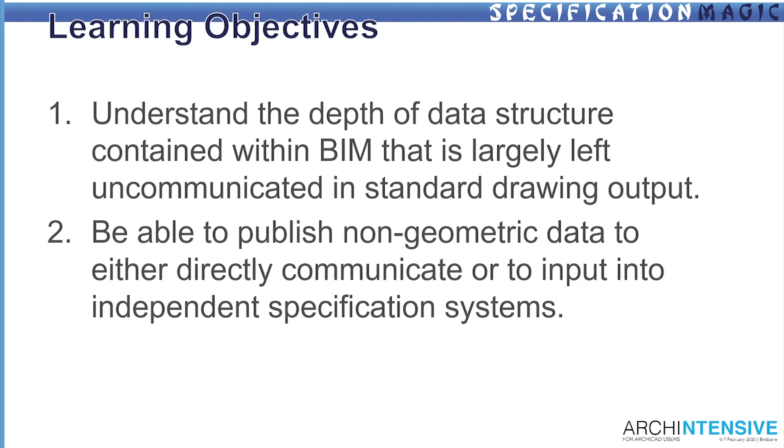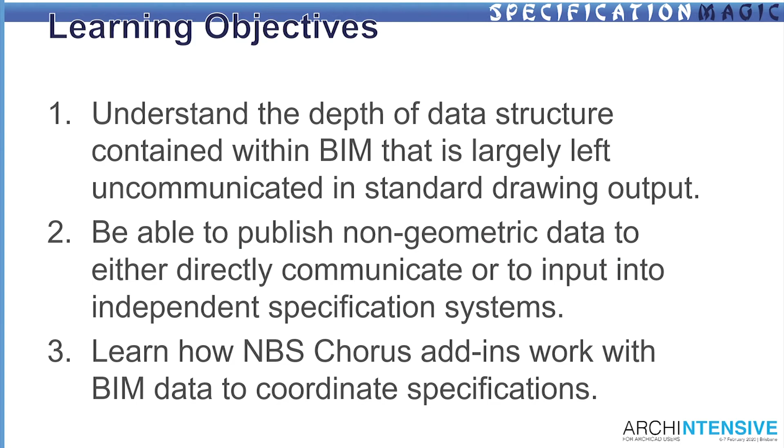So let's get on to our learning objectives today. The first thing we're going to talk about is understanding the depth of the data structure contained within BIM. We're also going to learn about how to push non-geometric data around in our models. And then we're going to learn about the new NBS Chorus add-in for Archicad and how it works with BIM data to coordinate your BIM specifications with your model.

So the story of Journey to the West starts with a monkey imprisoned under a mountain for 500 years for defying the gods in heaven. And I liken this to the amount of data that we get stuck with every day in our models. We have a wealth of information that sits in our model data that we never use, that we never share with our contractors, we never share with our consultants, because 99% of the time we reduce it to a drawing and send it out, and most of that information gets lost.

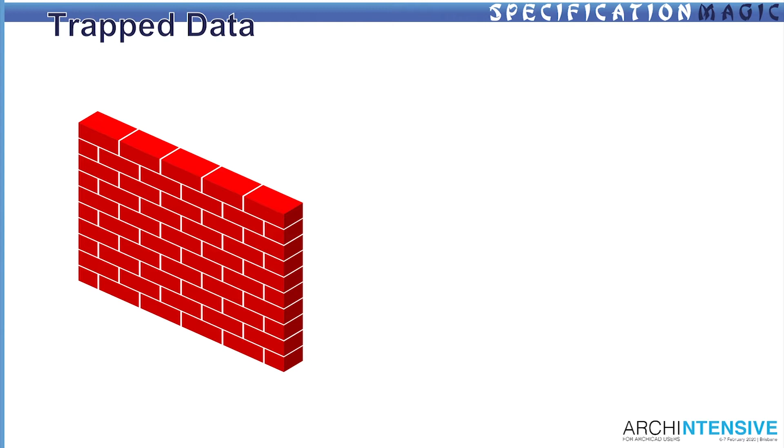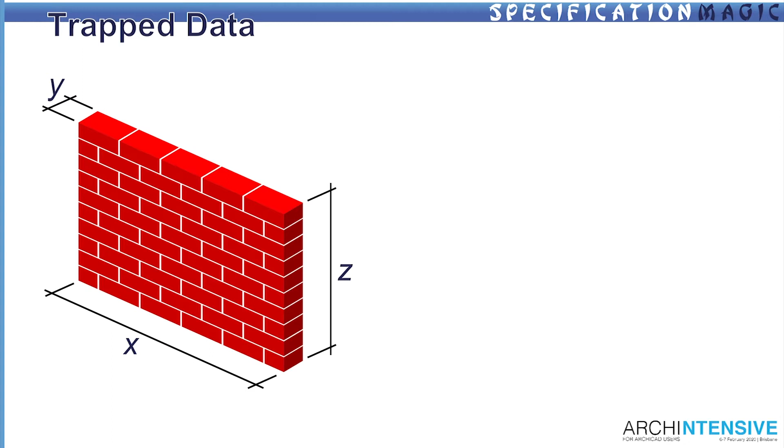When we talk about building information models and trapped data, we talk about things as simple as walls. This brick wall, on a drawing, we can express the basic geometric information of it. So we talk about its height and its length and its width, and we give it some basic information. On drawings, we have pen weights and cross-hatching and things that give it some description as to what it is. But the basics of it is that on a drawing, it gets basically defined as a brick wall at best. If you start to put more and more information into it, the drawings get confused and very hard to read. And so we end up trying to embed all of this data somewhere else.

There's a lot of information there, and that's not even the start of what goes into a brick wall. We have bricks, we have mortar, we have execution into how we want the bricks laid. We've got information about how we want the courses set out, how we want the brick ties done, how we want the cavities flashed, how we want the damp-proof coursing done.

All that information is very difficult to show simply on building information models or on drawings, without having to do lots and lots of 1 to 5 details, like they do in Auckland. And I'm not advocating that we need to do more 1 to 5 details. In fact, the less 1 to 5 details we do, the better, as far as I'm concerned.

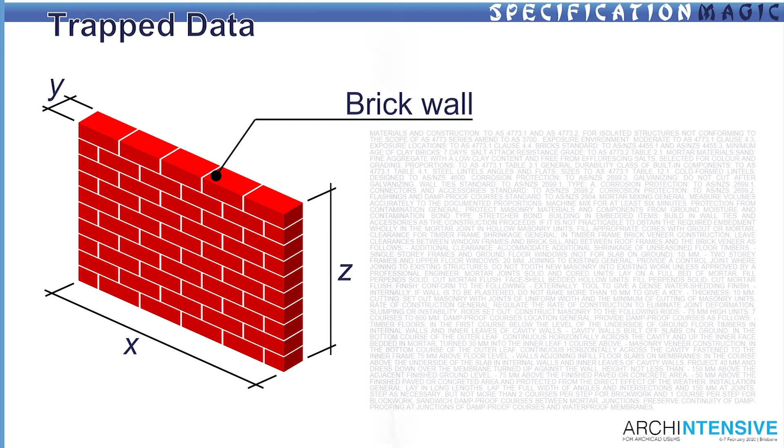So we want to take that information, which we can't show on the drawing, and find a way to put it out there. Because if we're not communicating it to our contractors, they're not going to know what it is that they're supposed to do to execute our design work. It's the beginning of wisdom to say, I do not know. But it is the end of wisdom to say nothing and hope that everyone else knows what it was you were thinking. We need to be able to communicate this information out to everybody.

If we go back and look at the evolution of how this information has come about, and how the building industry over the eons has communicated it - right back in the earliest days, we were doing chalk scratchings on slate boards, and that was how we communicated everything, changing and morphing it every day as we went to site and told them how to build the temples and how to build the pyramids.

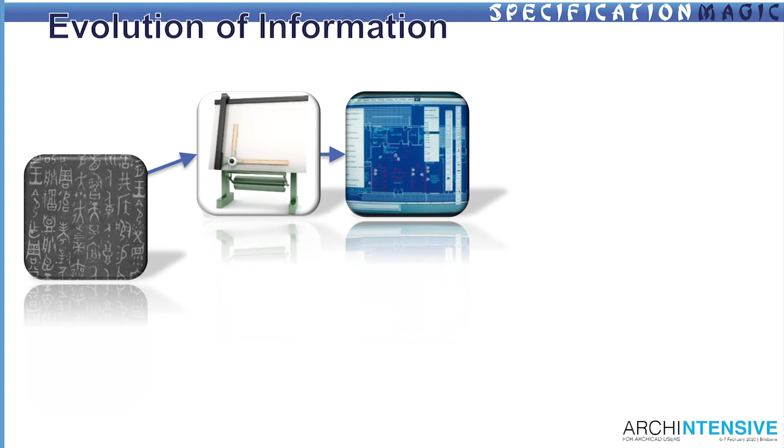From that, we got a division though. We slowly moved away to the drawing board and started to use paper and pens, and we came up with drafting conventions and ways of illustrating these things onto paper. And from our paper drawing board, we eventually moved into the digital age and we got to CAD.

And CAD was basically just the drawings, but in a computer. There was no more information, no benefit other than speeding the process up and the ability to copy and paste and things like that. There was no more information communicated through a CAD system than there was through a drawing.

From that, we've moved into BIM, and we've started to pull a lot more information into our models that define what these things are, what these objects are that we build with - they're buildings, they're walls, they're windows. So there's a lot more information that's intrinsic in the model.

But unfortunately, most of the time, we convert that just straight back to printed drawings that go to site, get all scrunched up, and that's the end of them. So the information, again, gets lost.

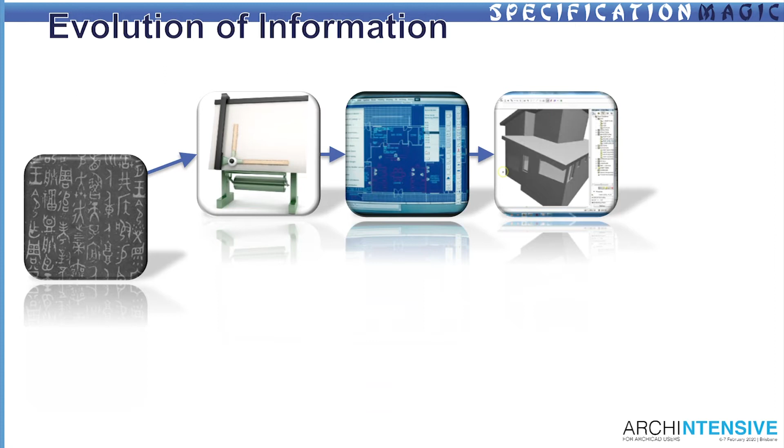And we're making advances every day to get further than the drawing board and further than the printed work, and we're trying to deliver things with VR and on-site iPads and all these wonderful bits of information. But if we're not accessing that depth of data that's inside those models, we're still not gaining a lot more than we lost back with the chalkboard.

Now, in parallel to this development of the drawing side of our communication, our specifications moved to the typewriters at the beginning of last century. And about three-quarters of the way through, they moved to Word documents. That's about as far as they got - that's about as much development for a long time that we saw.

We had some extra things that we started to put into Word documents - we could do hidden text and format them beautifully and share them via PDF. But that's about the level of development that we got to. We were kind of stuck back at the old CAD stage, and the specifications hadn't moved with us as the rest of our product moved into the BIM space.

So I just want to talk now briefly about the different models that we've then seen of how model information, BIM data, and specifications can work.

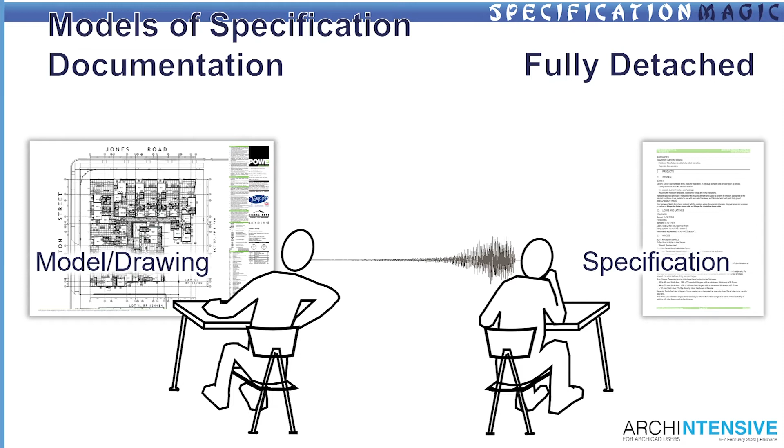The traditional method, I'll call the fully detached method, where the architect looking after the drawing sits on one side of the office and the other architect looking after the specification sits on the other side of the office. And the entirety of the communication that happens between these two processes is shouting across the room. If you're lucky - chances are you've probably outsourced the specification and you're shouting down a phone to the other side of town.

As the Buddha says, as the traveller who drags his feet only raises dust, so too the specifier who writes in isolation only creates painful scratchings.

If the information from the drawings and the specification are separated, they're going to conflict. They're going to have clashes. There's going to be a loss of the information transmitted from what the architect intends in the drawing and what the other architect intends in the specification, at best.

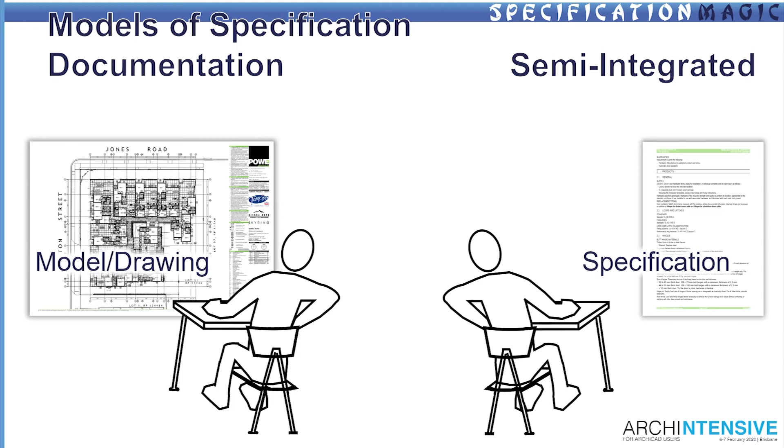So we then start to come up to a semi-integrated way of trying to deliver this information. We take our models and our drawings, and instead of shouting across the office, we actually find a way to extract some information out of our BIM and share it across the office to the spec writer, who then puts that together, in the hope that the information we're sharing means something to them and it actually formats across correctly, without creating too much work for ourselves.

But in the end, we end up always creating a lot more work for ourselves. Now, the basics of this workflow that we have developed in our office over the last couple of years: essentially we start off with our BIM, and we've got our model there of a nice interior space.

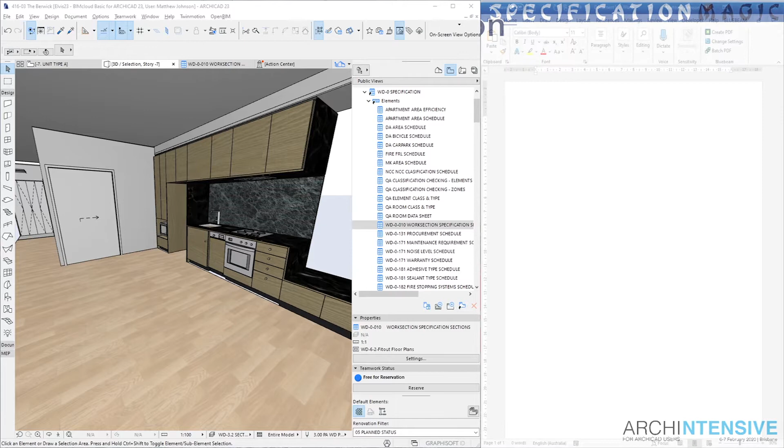And from that, our spec writer is going to start with a blank page, because at the moment we've given them nothing to work from. So from our model, what we'll do is go through, using the classifications that we talked about yesterday, because we classify everything in our model.

At the moment, we were classifying everything in our model to the NatSpec classification system. So everything in our model was pulling out its NatSpec code. We then produce this schedule out of our document, out of our model, and export it out as a list, as an Excel file.

And the spec writer on the other side of the office picks that up and goes and creates a matching list of Word files that match all of those clauses that we came up with. They've manually got to sit there and go through NatSpec and find each matching clause and put it all together. And then they go through and start to draft these bits of information.

And so what we do then to semi-integrate this is that they work on the stuff that's completely non-graphical. They work on all of the general clauses at the beginning about the Australian standards that we should work to, and the requirements for submissions, and the requirements for cross-referencing, etc.

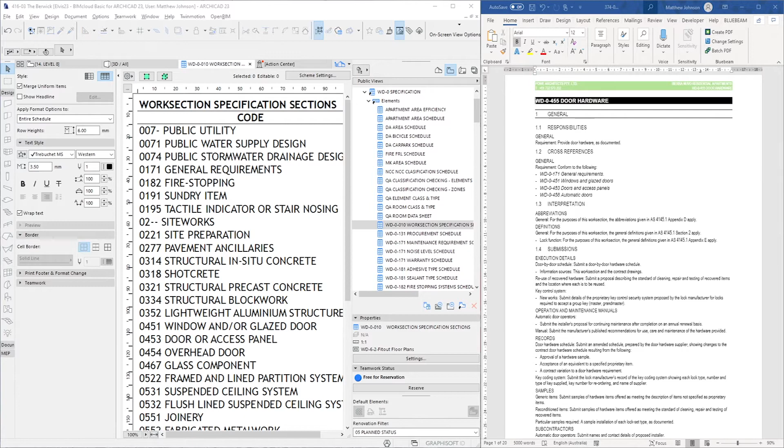And then in Archicad, we then try and come up with a way to create a schedule that kind of looks like what the NatSpec schedule in the back of that section looks like, as close as possible, with a lot of difficulty and a lot of blanks and a lot of confusion.

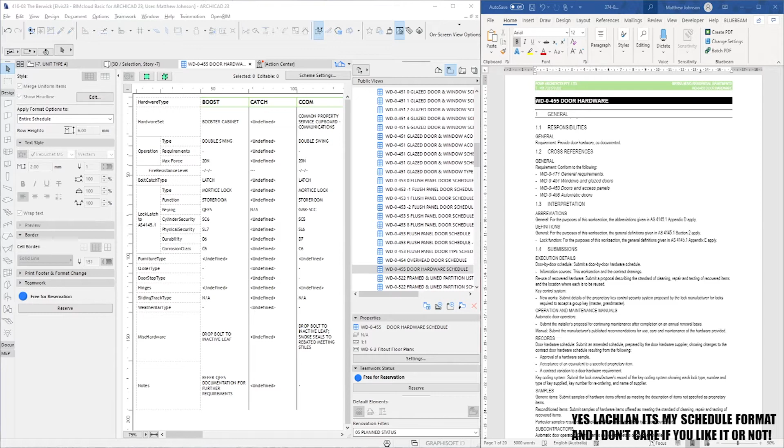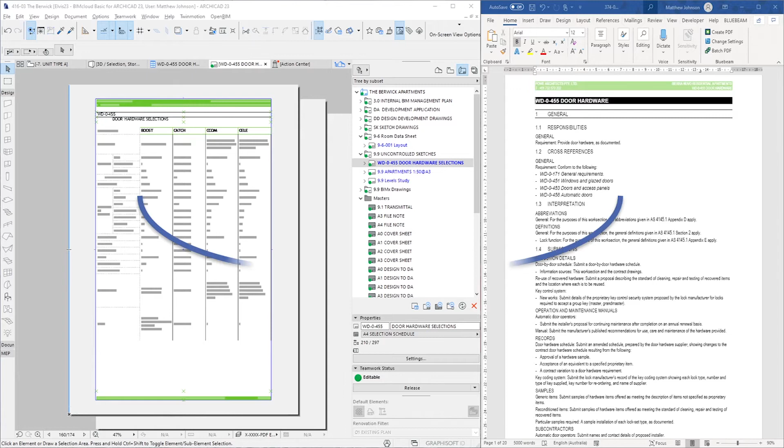And then we try and format it onto an A4 page so that we can try and squeeze it out in a way that, again, makes it look like it was written in Word. And then we pull those two bits together and we try and ram them together as a PDF and send that out to the client or the contractor, and hope they don't notice how much work it took us to do that. And hope we haven't burnt the entirety of the documentation fee on doing that process, which we have.

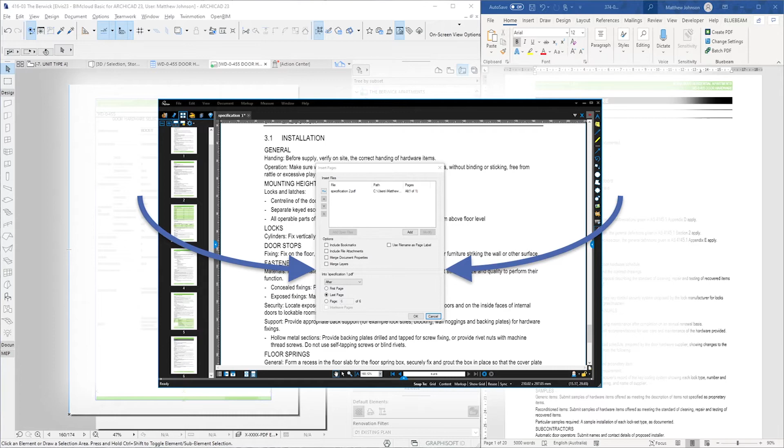The benefit of that process is that the clients and contractors we work with end up with a specification that they know and love, because it looks exactly like the specification they got last time that was done in the very manual way. And because they're against the idea of change, they've got something they're comfortable with, so they won't complain about it and they'll just get on with it.

The problem with that is that, as I said yesterday, we've created over 1,600 properties in our Archicad files just in an effort to be able to output those schedules in a format that kind of looks like it might belong in the back of a NatSpec specification. And managing all of them is a massive task, and somebody removing a property from one of them is a project killer, which is why backups are absolutely essential.

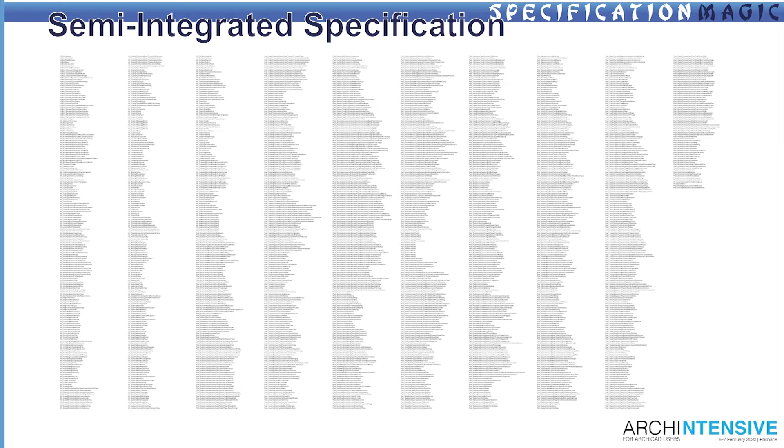So we do all this to make sure that it looks like we know what we're doing on the outside. But when everyone else sees a blue sky, there's always someone flapping his arms to keep the clouds away.

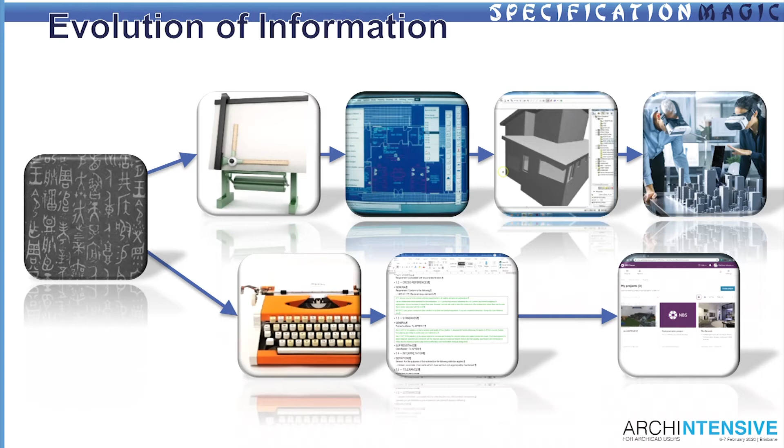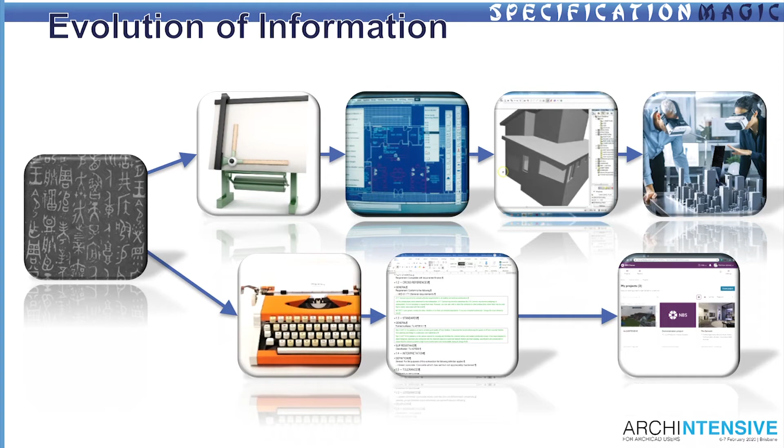So what we've now got, thanks to the NBS system, is Chorus. Chorus is a completely different way of looking at specification writing, well beyond the old system of typewriter and Word files. It is nothing like what you're used to from other systems you may currently be using in your offices. Chorus is built completely new. It's based on Uniclass, with all the benefit of the classification system without all the drags of having old Word files to go through.

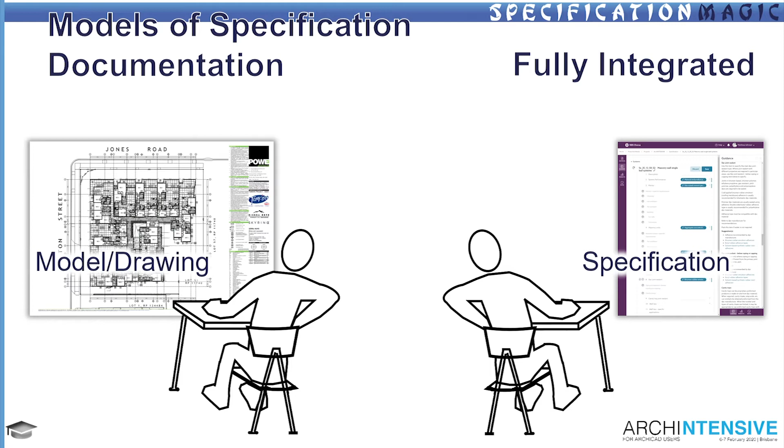So now with this, we can actually have a fully integrated approach to your specification. We can use this add-on that sits in between to connect live specification data, which is what it's become. It's specification data, no longer just words in a Word document. And our live data in our model - we can actually connect the two. So rather than sitting on either side of the office yelling at each other, our two architects can actually work together on the project at the same time.

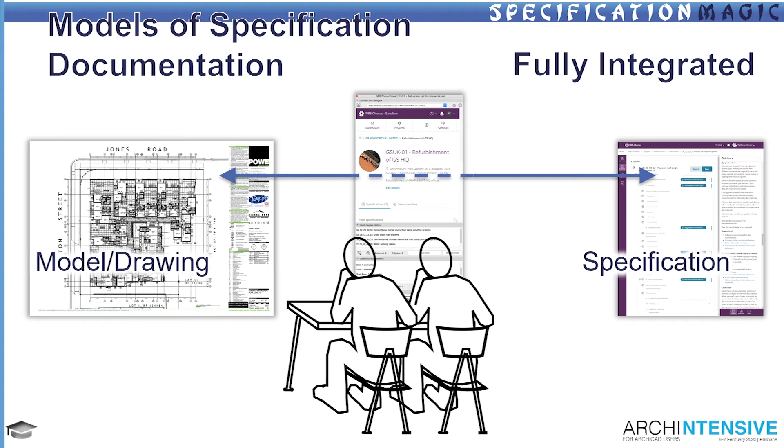Now, yesterday I showed this slide about the depth of model information. On the left, we had our level 4 classification that had a couple of properties, and over here we've got our level 2 classification that had a lot more properties. We talked about how much property information we needed to put in when we only went down so many levels of specification. The thing is, all that property data doesn't necessarily have to exist in your model.

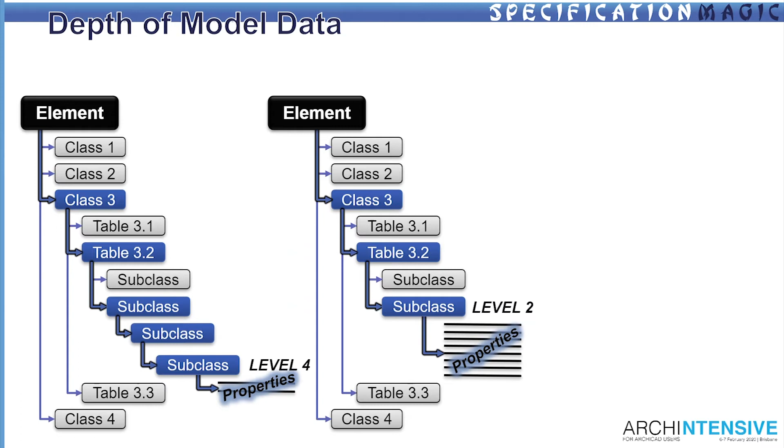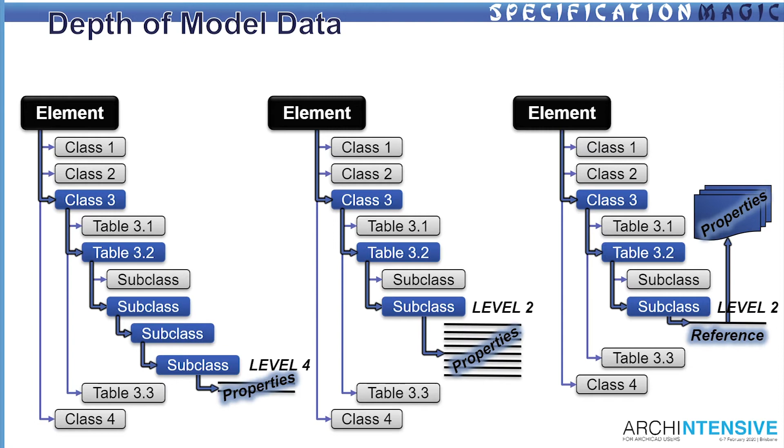It can live outside the model. So what the Chorus system with this add-on actually allows us to do instead is to get down to a classification system, maybe only as deep as level 2, and then use an external reference to where all that property information can be managed on a separate system. We keep the property load inside our Archicad file quite light, and we keep our Archicad file quite nimble. Also, the level of information that has to be assigned by our architects and CAD technicians inside Archicad is significantly reduced, because instead it can all be managed by the external Chorus specification system.

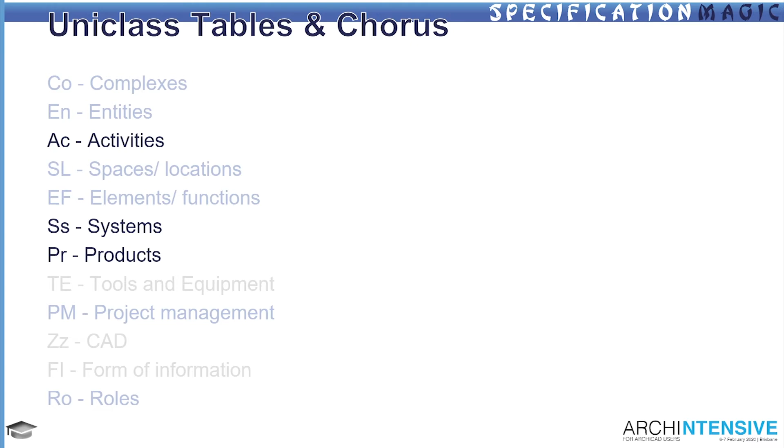The next thing we're going to do is drop out some of the ones about complexes, entities, spaces, and element functions for the moment because we don't need those either. And project management - we might come back to that later because that deals with preliminaries and things like that in our specification. But for the moment, I want to focus just on these three: activities, systems, and products. And we're probably going to drop activities as well, actually, for the moment, because systems and products are the ones we really want to focus on.

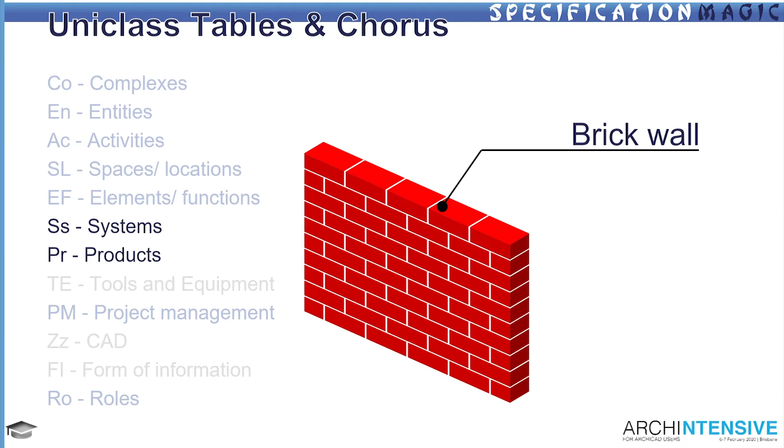So let's go back to our brick wall. We can continue talking about this as just a brick wall, but we can classify it as something better. Rather than calling it a brick wall, we're going to call it a masonry wall single leaf system. Sounds really nice and complex. And we can give it that code - an attributable code in that classification system that makes it more identifiable as what it actually is. But as well as getting that system classification for what that system is for that wall, we can actually, by doing that, pull in a whole heap of nested other classifications that then can exist within that.

Because we have to have some form of adhesives, we're going to have a product classification there for what the adhesives are for putting the bitumen waterproofing on the back of it. We've got the specification for the actual clay bricks themselves. We've got some damp-proof courses that we're going to have to specify, and some more waterproof coatings, and we've got some foam strips for our expansion joints, and we've got some mortar we have to specify, and the masonry cements that go into the site-mixed mortar.

So we've got all that information, but we don't want to classify that and actually attribute that to the wall, because as we talked about yesterday, we want to make sure that when we're classifying these things, we classify them to one class. So we're going to classify that with the system that makes up that wall, not 10 other classifications at the same time.

But what we can do by linking this across to a Chorus specification system is that by coming up with the single classification for that wall to say that it is a part of the masonry wall single leaf system, we can actually use the deeper referencing within Chorus to cross-reference then to all of these other requirements that can be part of that. And they're all classifications, they just don't need to be directly attributable to that wall.

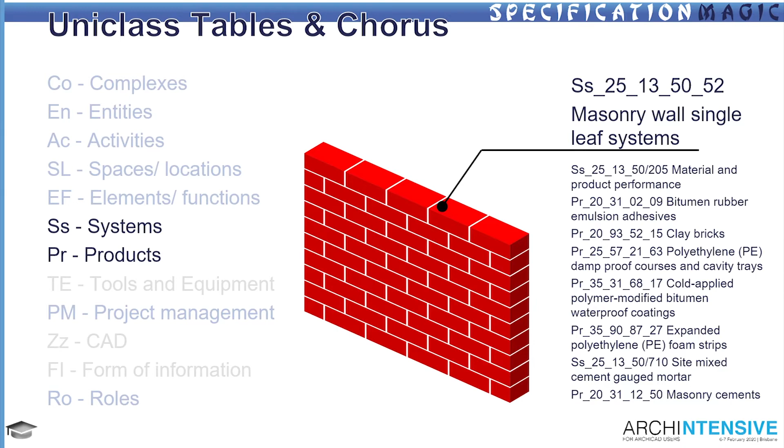The other parts of the add-on, we get a used clauses history window component. This portion of the add-on actually shows you which clauses have already been linked into your model data that you're working with. And if you happen to go offline, you can already use these pre-attached clauses and attach them to other elements inside your model.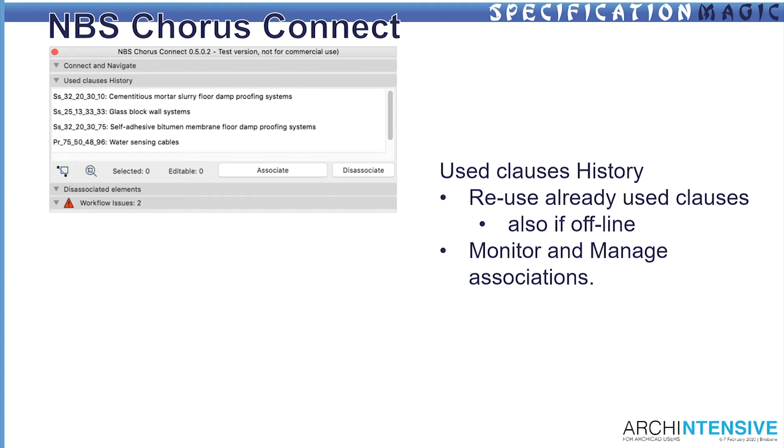So yeah, you can reuse clauses, and it also allows you to monitor and manage the associations. So yes, you can go through and select these and associate them to more elements, but you can also use it to go through and disassociate from the elements that you no longer want to attach those clauses to, if you want to swap them over to another clause or something.

We also have the disassociated elements section. I love the term disassociated, as if it's somehow been kicked out of the church or something. So the disassociated elements section identifies the disassociated elements in the model.

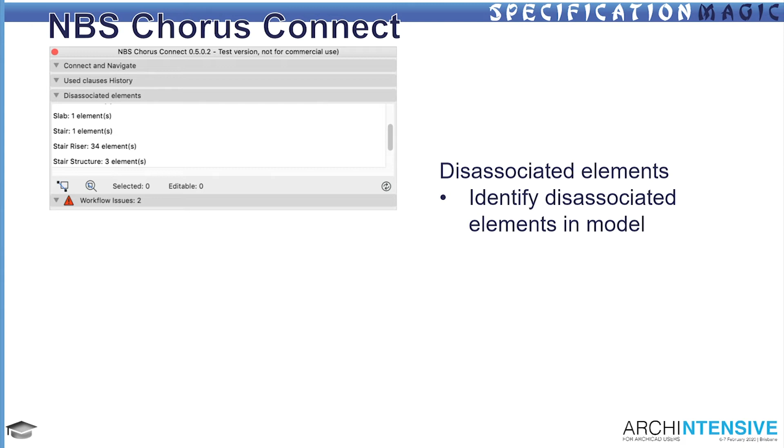It only lists from the active viewport. So if you're in plan view, it will only list the objects in that story that you're looking at. It's not going to tell you everything in the entire model, unless you happen to have it in the 3D window with everything turned on, and then it will start to tell you everything that it can see. If you've got the layer turned off, it won't list it here as disassociated. So that way you can turn off the layers that contain things that you don't necessarily want to be specifying.

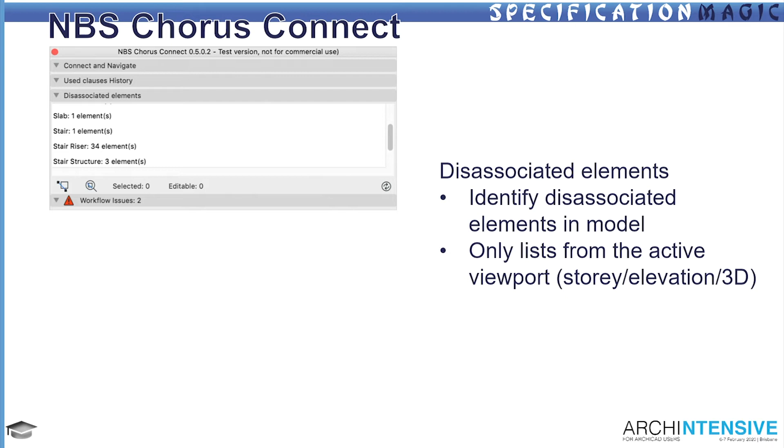Say if you've got layers that are containing your existing buildings for a renovation project or the neighbouring properties, etc. Turn those layers off and they won't turn up here as being disassociated, so you don't have to worry about trying to specify the building next door.

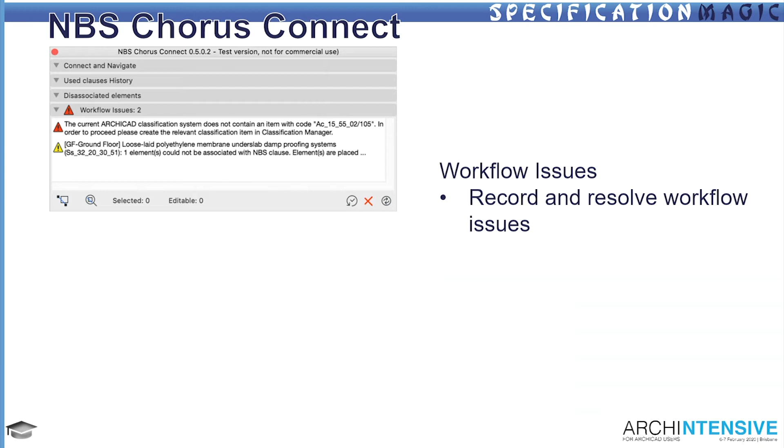The last bit of the add-on then is the workflow issues section. And this basically tells you when things might not be going the way you intended them to. So it helps you to go through and identify bits of the model or bits of the system that are not working. And we get two types of errors here.

We get a yellow warning, which is a fixable issue. And the yellow warnings are usually fairly simple things that are easy to do. It's normally things like you're trying to assign a specification clause to an object that's locked on a locked layer, or not reserved in teamwork. Fairly simple thing, and it will suggest to you that you want to reserve that first.

The red warnings are a bit more serious. Red warnings tell you about things that you need to fix before you go any further. And these are normally bigger, more fundamental system issues, like that classification system doesn't actually exist in your model yet - what do you want me to classify this as? And again, it's fairly good in terms of giving you feedback and letting you know how to work through those, so that you can actually address those issues.

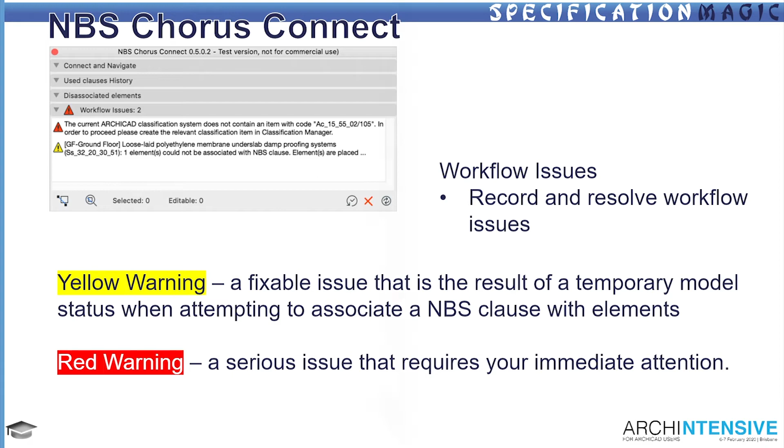So rather than just showing you stills of all of it, I'm going to try and do a live demo again. So we'll see how it goes.

As I said to you yesterday, I've got a very good reputation of breaking things. I have broken this a couple of times, but that's mainly my fault, not its fault. I will try and get this to work, so bear with me for a couple of minutes while we try and load this file.

Ooh. Crunch, crunch, crunch, crunch. That's the first not good sign.

Could be both. Disassociated means that there's currently not an association between an object, a clause from the specification, and that particular object that's in there.

Okay, so I've at least got that up, but it's not replicating my screen. Okay. Remember these for today. Oh, that makes it much better.

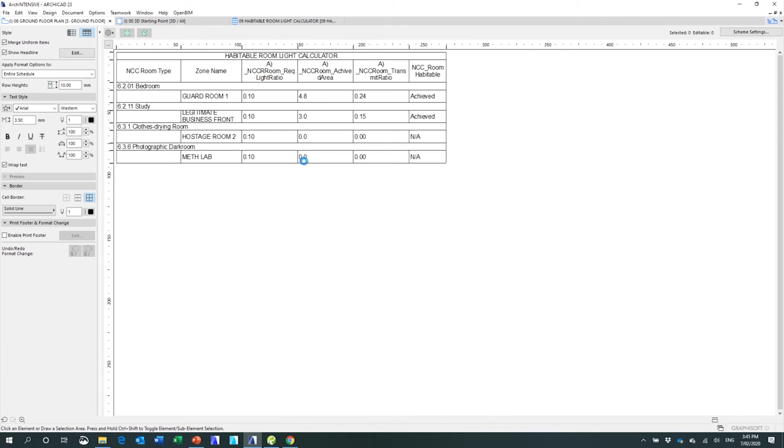But I searched for hours for it, and eventually found it. But there is a little bit of language and cross-referencing there that you do need to get your head around, and we're actually working on it, almost a how-to-learn-British-terms-for-building dictionary in the office, so that we can help people to find the right things. But it is slowly working, and that allows us to make sure that we get the right clauses.

But yes, there is Australian standards references in there for all that information. And one of the things that you get out of this, and I guess also while that's loading, I'll show you just an exemplar specification. So this is a sample specification for a primary school. And this is what the output specification system looks like. And you can see, yes, it is very different to what you're probably used to in terms of your specifications, but it's fully cross-linked. It's designed to be an active document.

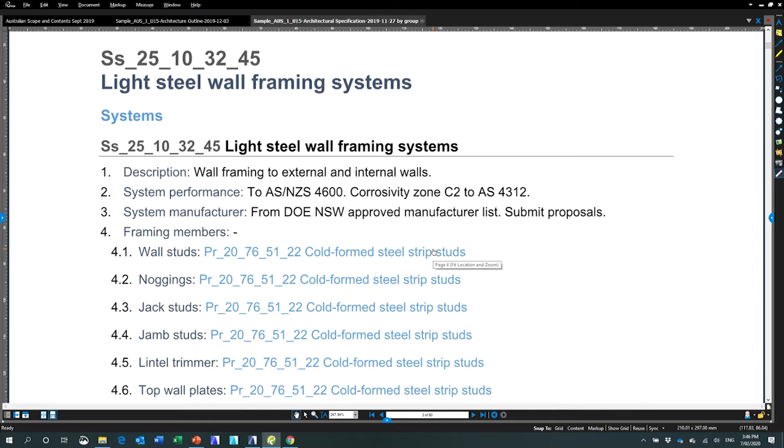You can print this if you really want to. If you want to destroy the planet, go ahead, print the damn thing. But as a PDF cross-linked, it's incredible because you can start to actually go into these clauses, and rather than having to go 'oh, that framing member uses these cold-formed steel strip studs, I wonder where that is,' well guess what, there it is. You just cross-link and hyperlink the whole thing through.

Oh, mineral wool slab insulation. Oh, that's to this CodeMark certification scheme. I won't click on it here because of the network link I've got, but that will then take you to the CodeMark certification scheme so you can understand a bit more about that. Oh, this is to that standard. This will take you to a page that talks about what that standard is and what it entails, and then eventually you'll be able to cross-link across to that. If you've got standards access, you'll be able to know what standard to go and do and look all those up. So yes, there is Australianised content in this.

The Australian content is constantly building, but in terms of the output, I'm falling in love with this format of this specification every day I start to use it, because it's much easier to find your way around rather than having to leaf through it. I mean, this one's a simple one and it's an 80-page specification.

Who here has done specifications of more than 100 pages? Who's done more than 200? It's crazy trying to sit there and imagine someone on site with 200 printed pages trying to find the specification of the screw that they need to buy.

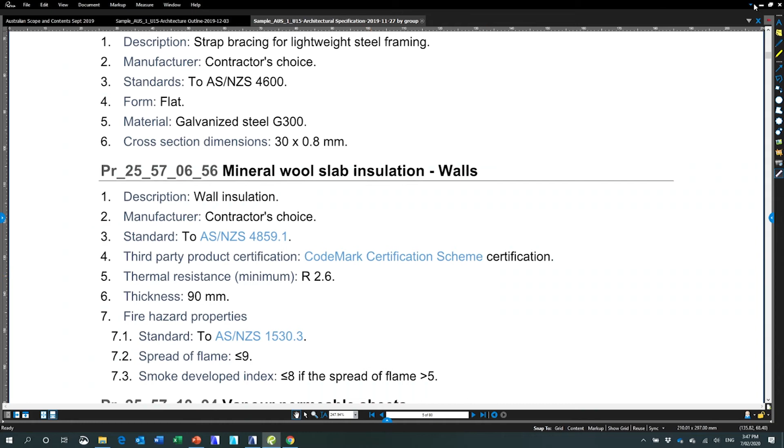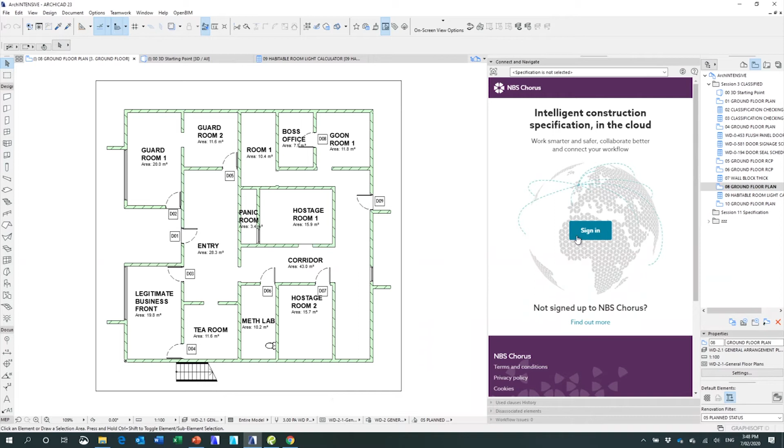Come on, phone, work. Yes. Phone, keep working. Thank you.

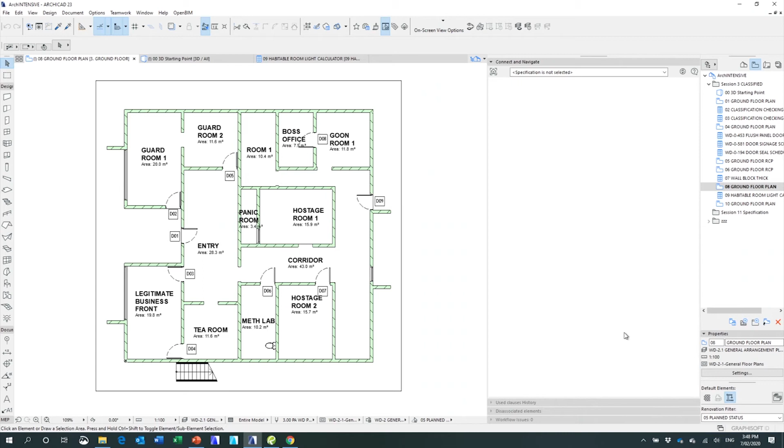Okay, so I've now signed into the plugin and it's now going to load the NBS Chorus specification screen.

There it is, the screen as I access it in Chrome. There's my 3 projects that I currently have in there. And I go back to Archicad, and there are those same 3 projects.

The great benefit of having these two completely linked is, and you'll see in a minute how quickly they replicate between the two of them, that you can have someone working in an Archicad session with this add-on open, adding clauses, and someone sitting right next to them with the Chrome screen open, filling out all the detail in that specification as they go.

So it doesn't need to all be edited inside here, even though you can use both sides of the system to actually do this.

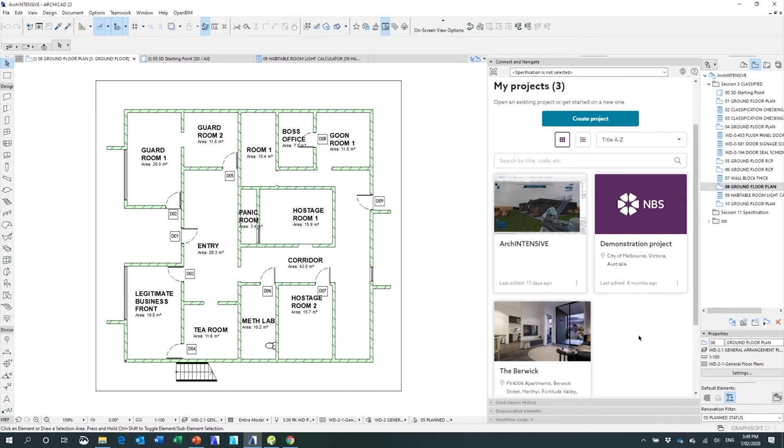So I'm going to take my ArchINTENSIVE specification, my project that I've created here, and I've got two specifications that I've created. I've got a prelims section and I've got my specification, which has my construction documentation.

We'll just go in and have a look at this quickly, and you can see I've already started to put a couple of clauses in here. I've done some masonry walls, some toilets, and some expanded polyethylene foam strips.

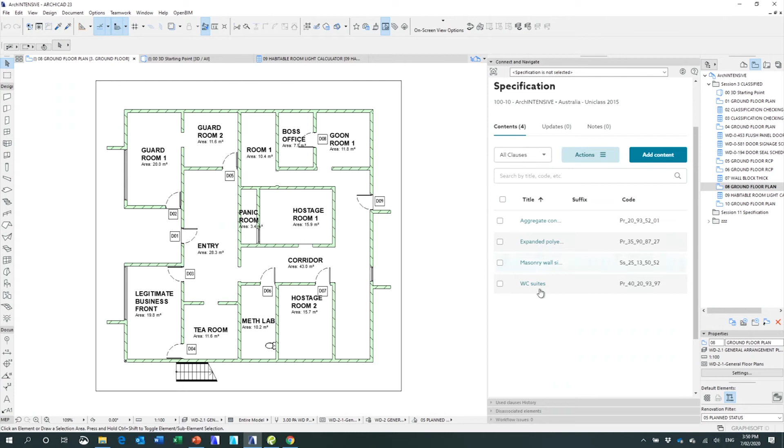But before I get into doing anything with those, I'm actually going to go back up a level. Come on, back up a level. That one.

I'm going to go back up a level, and start here, and actually associate this specification to this model, to this project. I can tell you now it's not going to work.

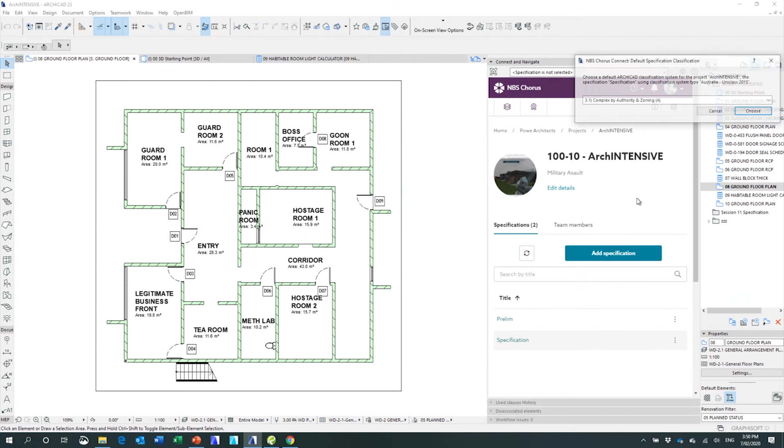So, specification, associate now. And straight away it asks me which classification system I want to classify this to, noting that it's asking me to use a classification system, Australia Uniclass 2015. The reason it's doing that is it wants to do a one-to-one matching between the Uniclass system that the specification is written to and the same classification system with the same codes in your model.

The problem being, I haven't actually imported that classification system into my model yet. So I'm going to cancel that.

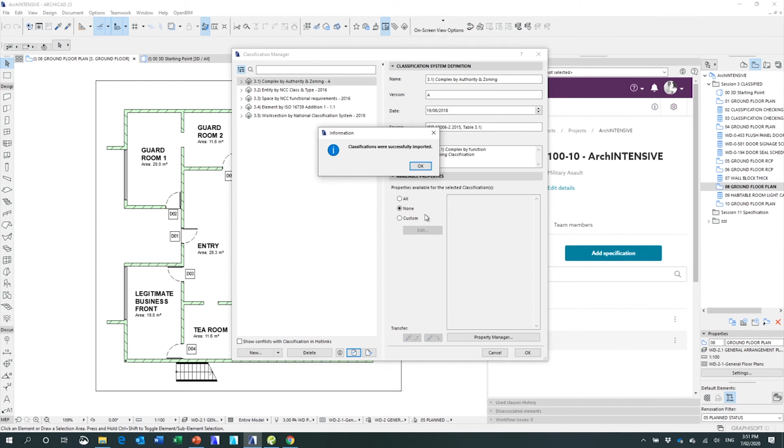I'm going to go back over and quickly import that classification system, which we did yesterday. And there it is — it's now got the classification system available for me.

And I'm now going to go back over to my add-on once it's finished thinking, and tell it again, associate with the model. Yes, I want to associate the specification, and I want to associate it to that Uniclass classification system that I've built in.

That little icon that's now turned up next to specification tells me that section, that specification, is linked to something — linked to this model. You can go back out and disassociate it, unlink it from this model if you need to.

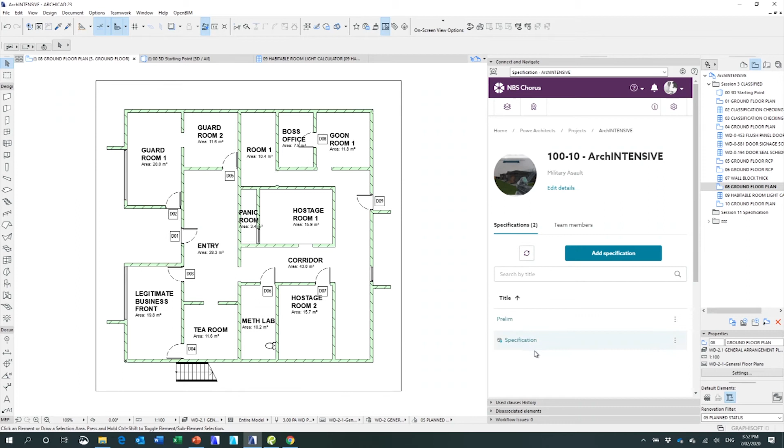But once we've associated the model to the specification, we can now start to go through each of these clauses and start to actually assign them to elements within our model.

So I'm going to take all of the walls that I've got in this model, because I know that they are blockwork walls, and take this specification here for the masonry wall single skin and associate it with my model. The following will be connected and associated with the model. Yep, associate it now.

And then it opens up that specification, and because I've got those walls selected, it tells me these walls are now masonry wall single leaf systems.

And you can go through and see the layout of that specification. So you can see I've already started to tell it there's a description for that, and that it has a system performance, and it's got a certain type of mortar.

And if you scroll down here, you can see there are other clauses that have been crossed out. They're crossed out because I've gone through in the specification that I've been working on in the Chrome instance and said, I don't need those clauses at the moment.

So I've just parked them at the moment. I might come back to them if I need them. They're there as headers to remind me that I might want to use them in the future. So they're not being completely deleted. They won't turn up in the final document, but they're there just to remind me that I might want to put them back in.

I've specified some aggregate concrete blocks. I've specified some movement joint components. And I've gone down here and I've got some execution requirements. And if I go down and have a look at this, all of those things that we saw with the blue capsules around them, they're now available down here as further information.

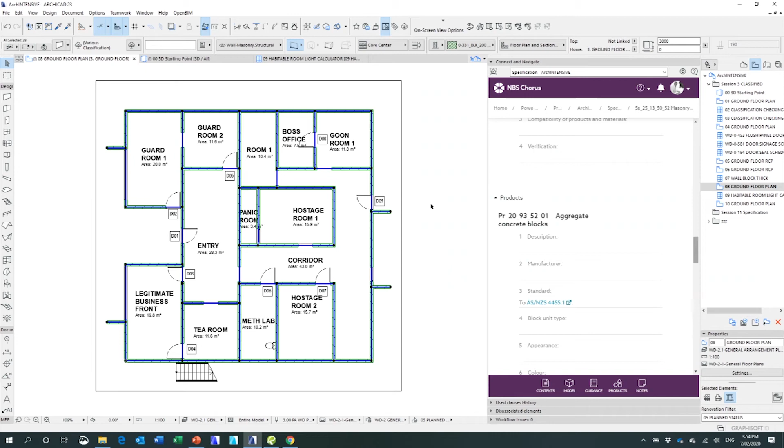But nowhere in that process do you need to actually get those walls classified and leave it. No, and the thing is, by telling it through the NBS add-on that I want them to be of that, when we actually go and have a look at those walls and actually look at their classification, it's already done the classifying step as well. So you don't have to classify them first and then specify them. You can just select them and tell them what specification clause they go to, and it will classify them as part of that process.

So what the add-on actually feeds it with, it links the specification clause to the classification in that classification system. It then also adds a few properties. And the properties it adds are these ones down the bottom here. Apologies if you can't see them at the back of the room. But there's 5 properties that it adds: NBS Chorus Clause ID, NBS Chorus Code, Chorus Title, NBS Chorus Prefix, and NBS Chorus Suffix.

Now, you shouldn't really edit any of them. The NBS Chorus Clause ID is a wonderful big GUID reference there that actually links to your specific specification clause. So that's the actual bit that the system's using to link the 2 bits of information together.

Because you can have multiple instances of a classification. So if you've got 2 different types of blockwork wall, you can actually have blockwork wall 1 and blockwork wall 2 and have them as different type instances. So they'll have the same classification code. So what it uses is it uses that GUID to identify the 2 of them.

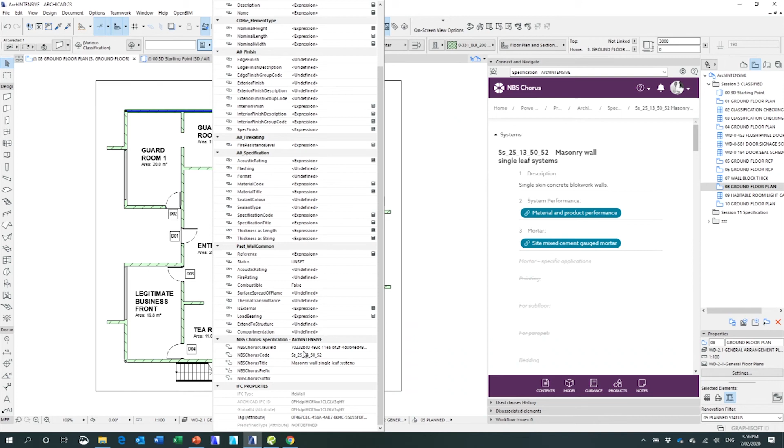That will automatically add that in here into those pieces of Archicad properties, which then means that on your drawings, for the printed output, you can then label those clause IDs. So rather than having to do long descriptions about what each of these are, I've now put those walls on here so I can actually take an out-of-the-box label, classifications and properties.

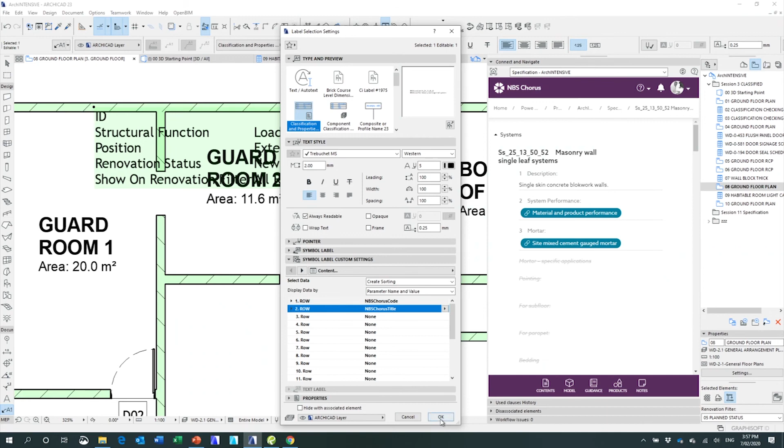And if I go into that label and say I want to create sorting and I want to do the NBS Chorus, I want the code, and then I want the title. And so straight away, I can be coding it to see that, yes, it's that specification code, and that's what it's called. It's a masonry wall single leaf system.

Or if I had a prefix or a suffix, I could also add that in. So you can then automatically start labeling up your model with linkages to all of your specification data.

So if someone is then on site without access to the model, they can then sit there and go, okay, that's the clause I'm looking for. They've got the PDF, probably on an iPad, do a search, there it is, I've got that section. So does that make sense? So that again gives you access to all of that information within here.

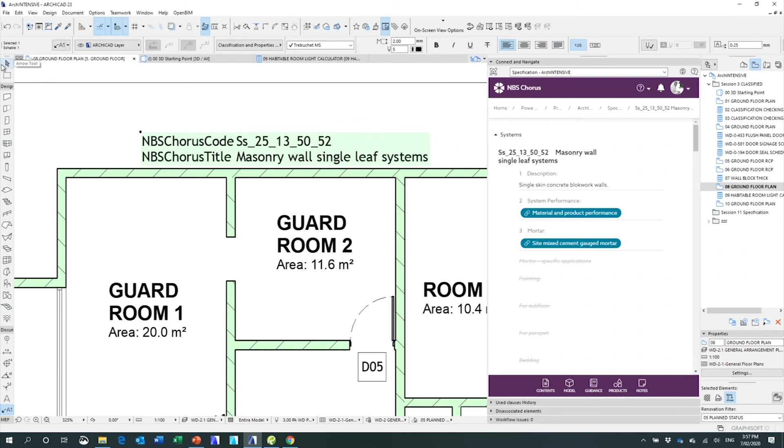We can also, if we want to, create more clauses in here. So I'm going to take my front door, I'm going to add some more content. So I want to go looking for... let's just do a simple thing and search for doors. Or what are we going to pick?

Door assembly systems - Mike, that sounds like a good one. So I'm adding door assembly systems. Now if I go into the content section, I can see, yep, there's door assembly systems. And I can go in and start to write that.

It's bordered in, it's all empty at the moment because we haven't selected any of these properties yet. But you can see that all the information sections are there for that to start being described. We can go through this section and say, okay, what are the suggestions? What have you got? I need some material and product performance, so I'm going to add some information there.

The system manufacturer - I don't have any suggestions for that at the moment. They might know what they're doing with it. Okay, it's good that we've got one. We can start to then pick some materials. So what sort of materials do we want? Do we want them to be aluminium or steel or wood? Yeah, we'd call that timber here. So you can go through and start to specify that.

And then when I click save at the top, if I come down and have a look down the bottom here, you can see that it's added some information there. It's a subpart there for that, and it's added the property information about aluminium door frames. So it's building in all these products and everything as we go.